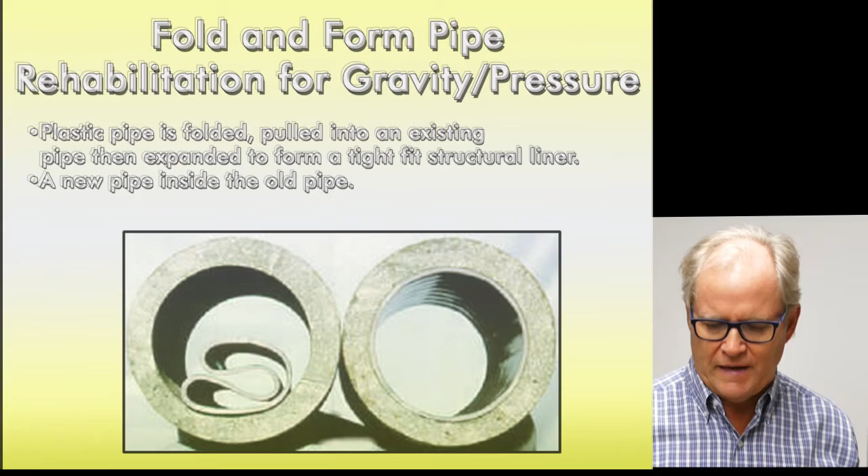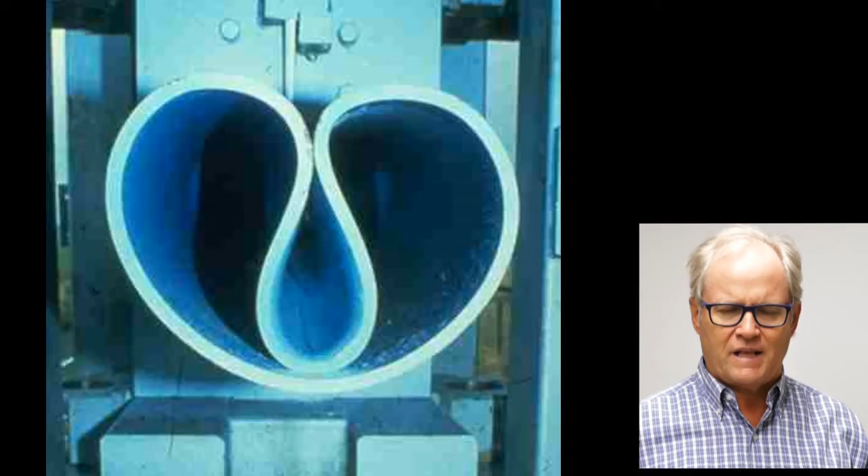Fold and form. Fold and form is another close-fit type rehabilitation of pipe. It's a PVC product that is brought from the factory in this format that you see on the left-hand side pipe, which is folded down, it's collapsed. It can either be collapsed like that into kind of a C format, or it can be collapsed down into an H format if it's a bigger roll. But it comes in a collapsed format, pulled into place into the host pipe.

Both ends are sealed. Then they inject steam and air into that to soften the pipe and then to blow it up into shape. Once it gets fully into shape, then they gradually cool it down, and then it forms a hose inside the pipe. Then they go in and cut out the laterals robotically later on.

It's not used that much. IPEX, the large pipe PVC manufacturer in Canada, has bought the franchise for it and is now starting to reintroduce it back into Canada. It was here 10-15 years ago.

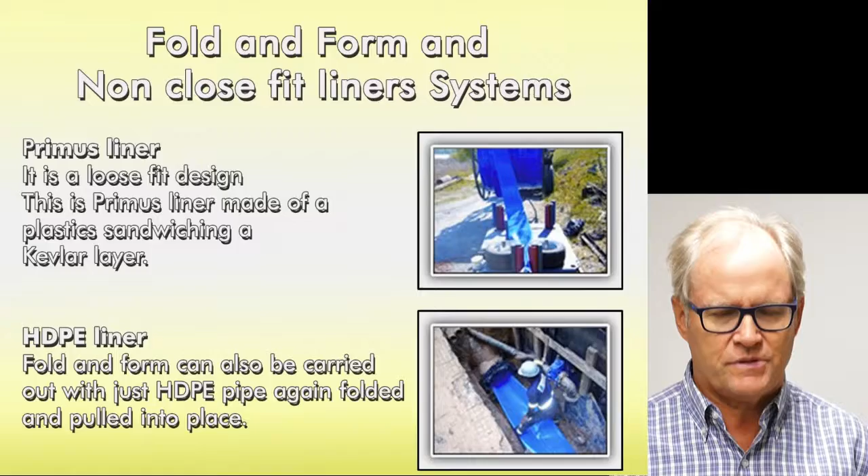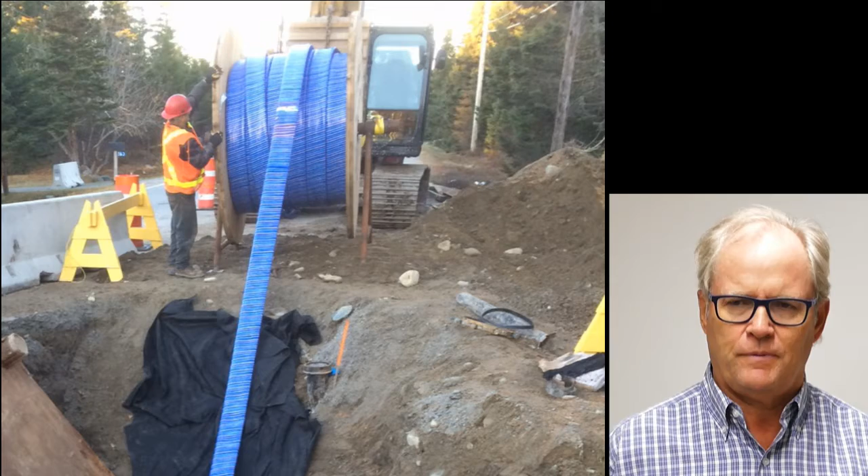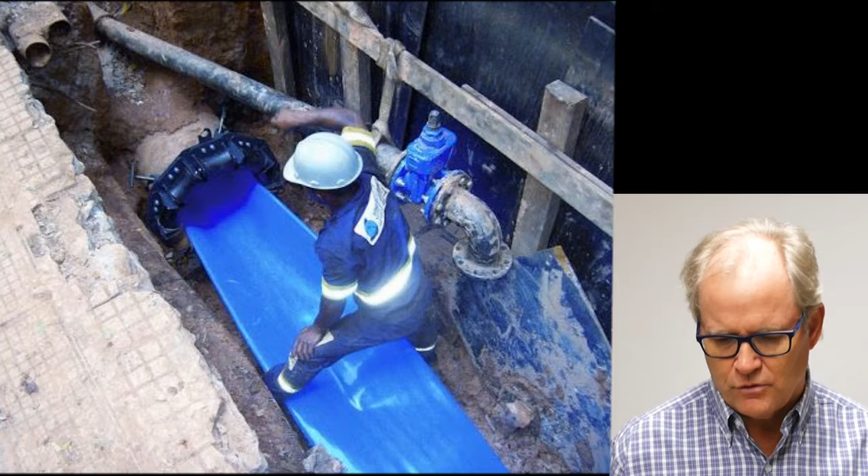Fold and form, so the fold and form, we're talking about the Primus liner. Here's the Primus liner. Some photographs of the Primus liner. It comes in a flat format from the factory. We roll it in half with some rollers and introduce it into the host pipe, and then blow it up once it's in the host pipe, and it pops back into place. It is essentially a more robust form of a lay flat hose, but as I said, very good for high pressure.

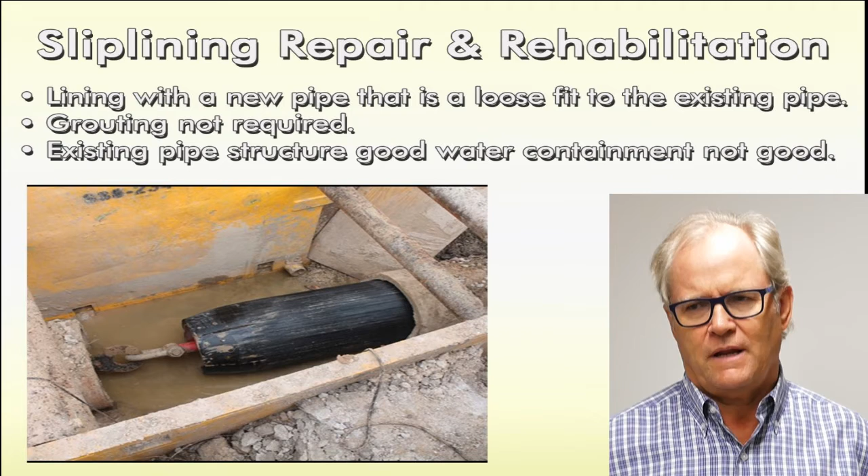The other thing we've got is high density polyethylene liner. High density polyethylene, if you go thin enough on it and you get into the DR35s, DR40s, DR50s, it more or less is a lay flat liner as well, because it's a very thin pipe. Again, you can fold that down, introduce it in, and then let it pop back up again and become a close liner. Or you can use high density polyethylene as a loose fit liner and introduce it as a rigid pipe.

Here we go with a slip liner. Here's the loose fit high density polyethylene as a slip liner into a water main project. This is a rehabilitation of a water main project in North Burnaby a year or two ago. And it's quite a large diameter. The existing pipe was a 36-inch pipe or a 900mm pipe, and we brought in a 750mm high-density polyethylene into this pipe to rehabilitate it.

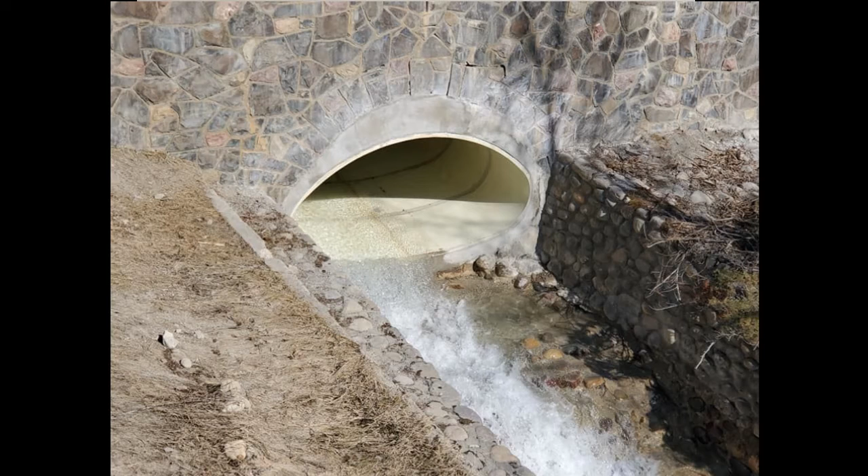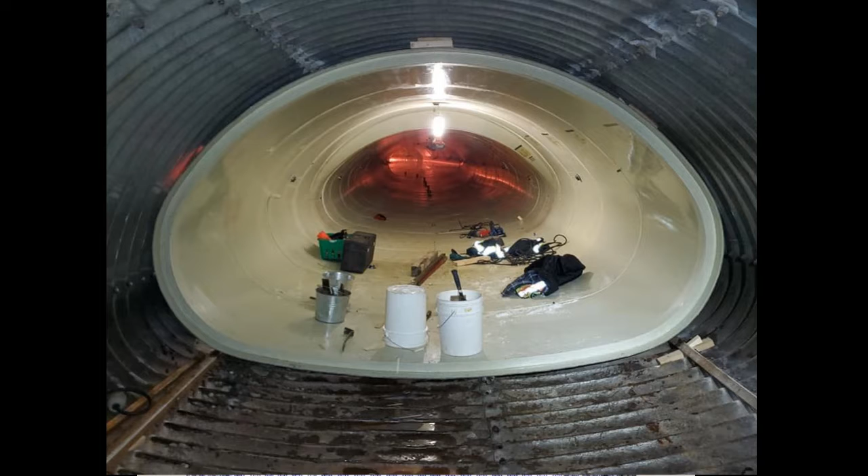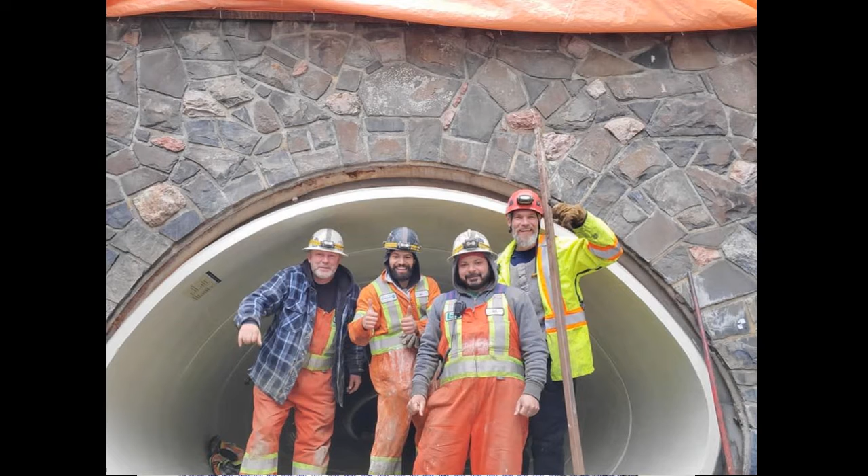This is a totally different type of slip lining. This is a slip lining with a rigid product. This is suitable for storm sewer situations and or sanitary sewer situations. This is a fiberglass pipe that is pre-made for this particular slip lining job. They're actually made in Dubai by a company called Channeline. Hobas is another manufacturer down in Texas. This pipe is shipped into the job after you've tested your existing pipe and you've proved the diameter and you're ordering the pipe to fit.

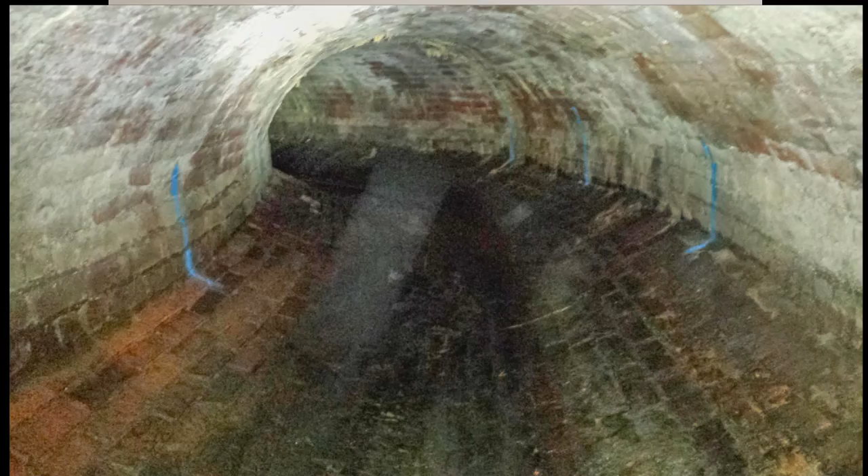Here's an example of the Channeline pipe being used in Victoria on a brick sewer line underneath the Ross Bay Cemetery. This is a very challenging job in that we only had one access point to this one. And there was a number of drops and bends on this one. But again, the Channeline pipe was able to be ordered in short enough lengths so that it would fit around the bends and fit around the vertical drops.

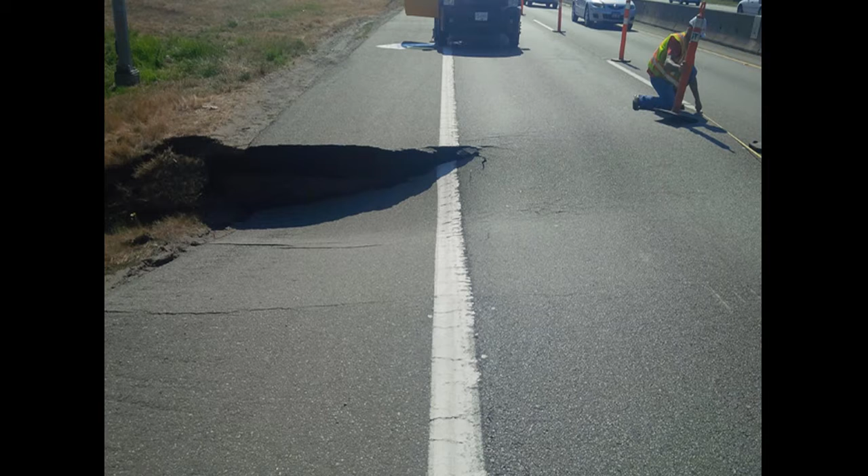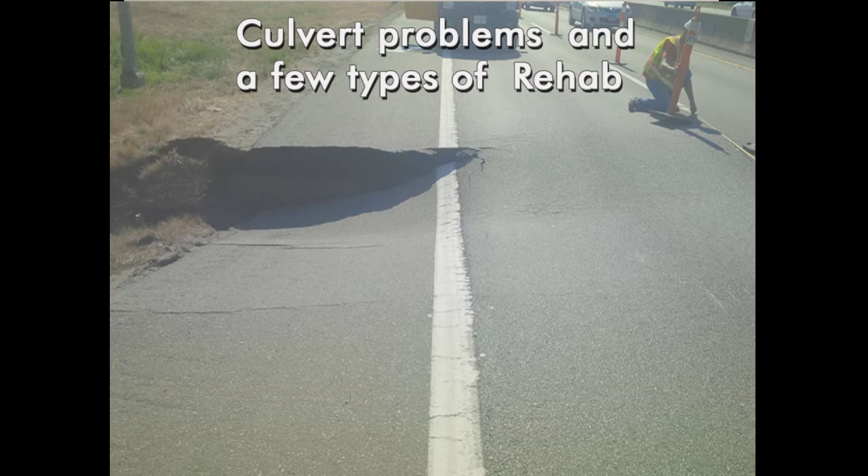Culvert rehabilitation. Culverts exist all over British Columbia and all over Canada, in fact all over North America. We have approximately 30,000 culverts in the Lower Mainland and the Greater Vancouver area alone under highways. They've probably been the poor brother of most rehabilitation processes so far. Most cities don't have a handle on their culverts right now, but as I said, they're probably the last ones to be rehabilitated.

Here's what happens though when you don't rehabilitate your culverts. Here's an example of a culvert in Richmond that collapsed about 3 years ago on Highway 99 just south of the Oak Street Bridge.

Here's the picture of that culvert on the inside. The face of the culvert we're looking at here is the north face, which is against the Oak Street Bridge. That didn't fail. But you can see right in the middle of the photograph that the corrugated steel seems to be gone. And it was, in fact. When we went through and tested that pipe after it failed, we found that there was one 2.5 meter section of pipe that I could put a hammer right through.

But the failure was very local. It was about that line that you see there, 100, 200 millimeters above that, and below that the steel was at full strength again. So it was a very local failure, but it caused a shear.

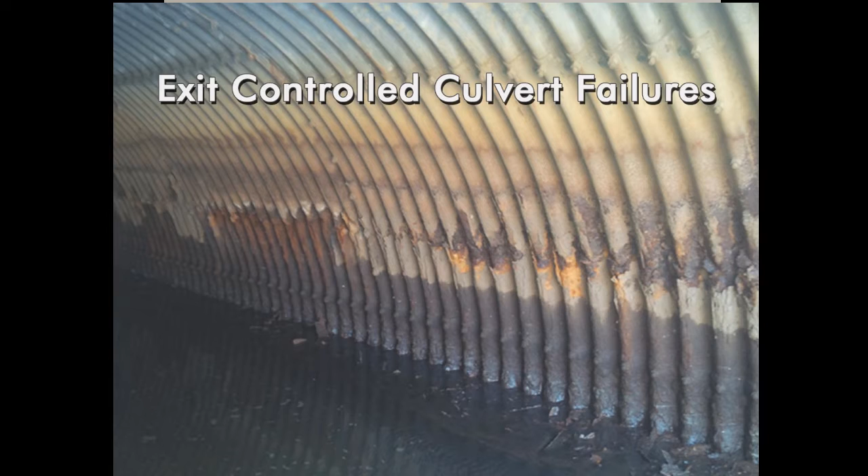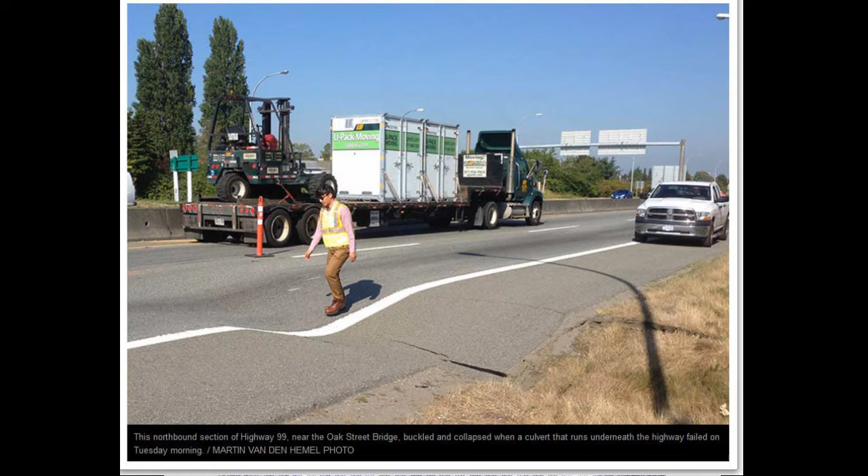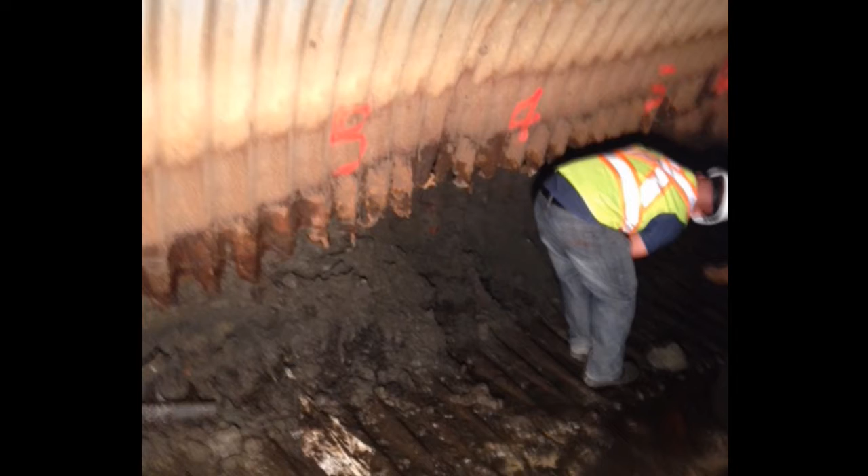That's the shear. That's the south side, which is what caused the failure, as you saw in the photograph two shots ago. So the crown sheared and fell inside the bottom section of the pipe, and that allowed the material to come in and allowed the road to collapse. The pipe wasn't going to come down completely, but it was going to come down about 400 or 500 millimeters, which of course is not any good when the road is above it.

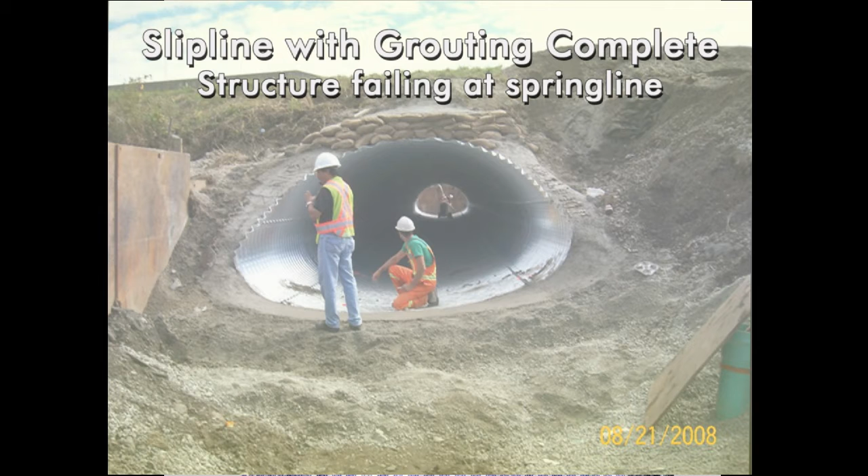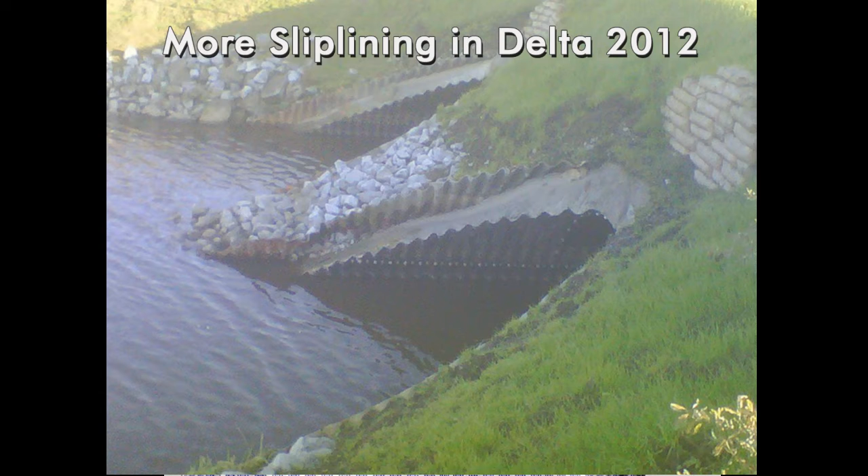Here are some culverts that we repaired or rehabilitated in Delta, where 112 crosses over Highway 99. In fact, we did Highway 99 there. We did, this is Hornby Road, and we also did BC Rail, all in this zone, which is for Central Creek going through Delta.

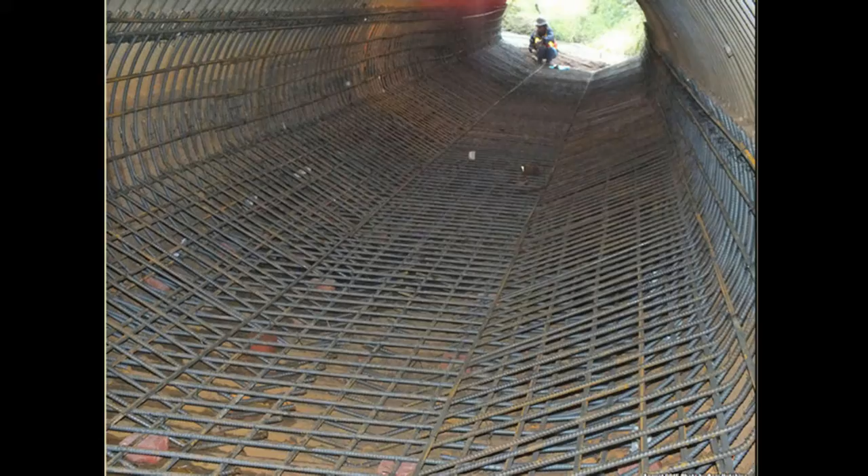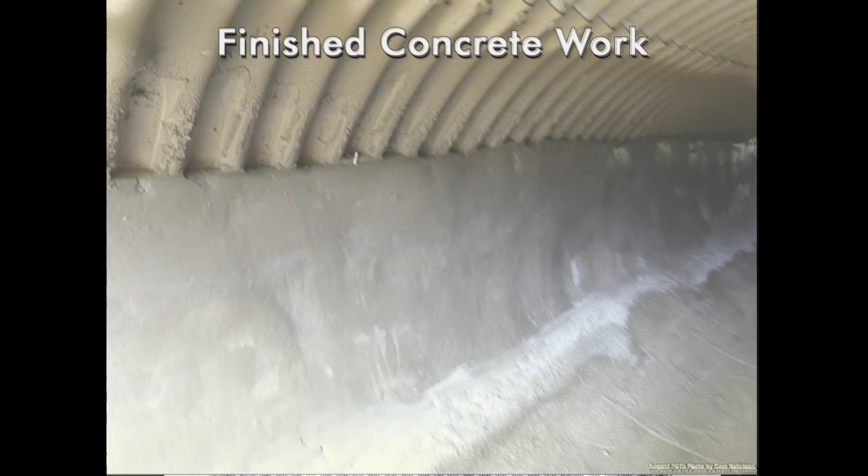Here's another culvert rehabilitation methodology that we've been using, which is to reinforce inverts to the culverts. This is very suitable if the invert is gone, if it's an entrance control culvert. So generally, let me step back one second. If it's an entrance control culvert, meaning that the entrance is what controls the flow of water going through the culvert, then what tends to go is the invert of the culvert.

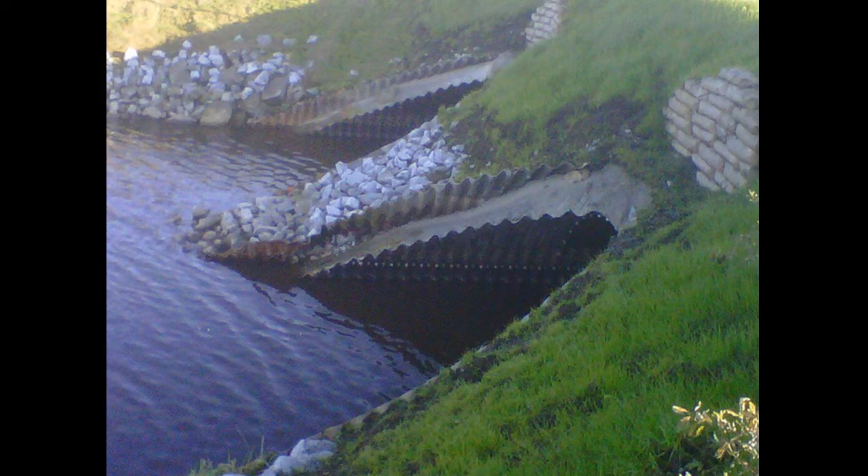If it's an exit control culvert, which is very common in Delta, Richmond, where there's standing water in the culvert most of the time, the area of corrosion tends to be about 9 o'clock and 3 o'clock, or thereabouts, 8 o'clock and 4 o'clock. And the inverts in those pipes can be in great shape. However, we have to rehabilitate.

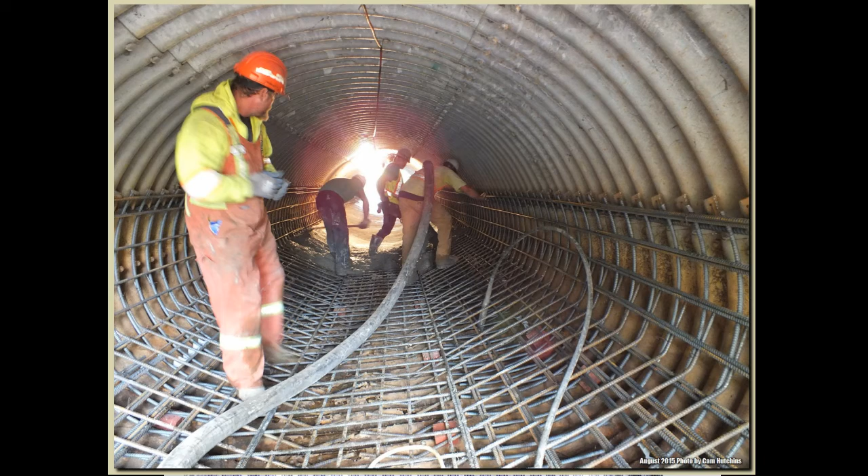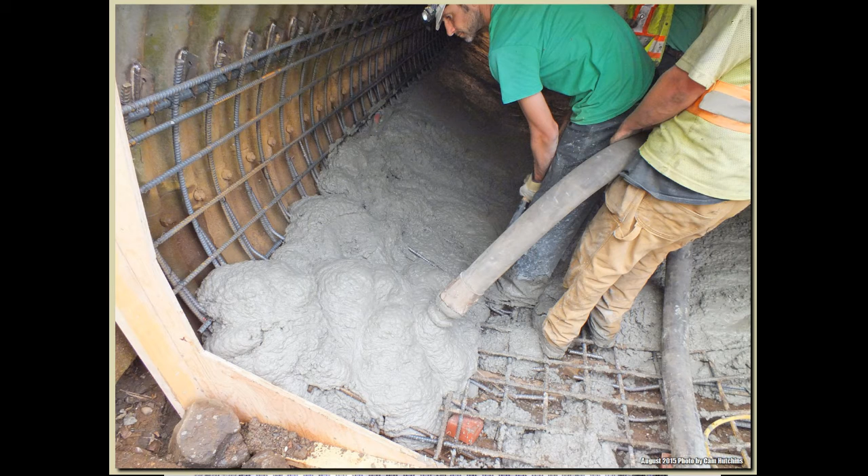And so we're back into this area again, where we said two things about this culvert here in particular: as a vessel to contain water, it doesn't function anymore because it's got holes in the sides, so the water is percolating out into the ground, number one. Number two, as a methodology to maintain a structure, it has lost that ability.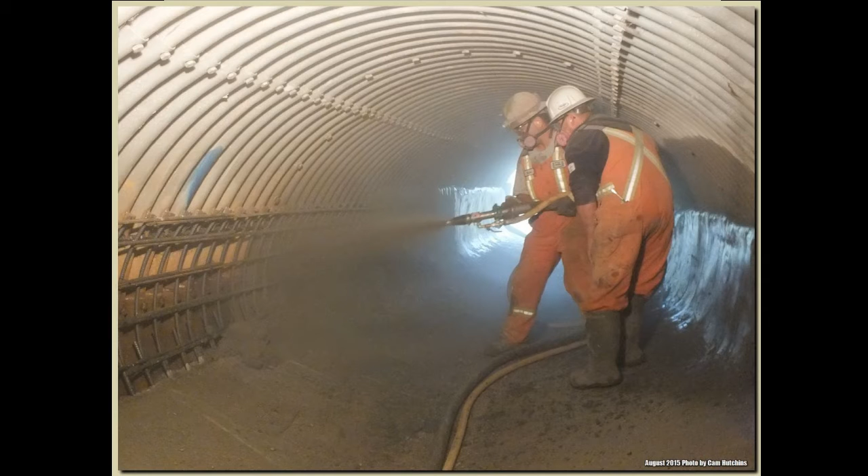And so we're rehabilitating it such that it will have a structure, it'll be able to hold the ground open, and therefore the road won't collapse above it, number one. Number two, that it will contain the water and carry the water from one side of the road to the other without allowing that water to go into the road structure. So when we do these rehabilitations of culverts, we're fixing two of the issues that we had at the very start. So here's an example of the finished product.

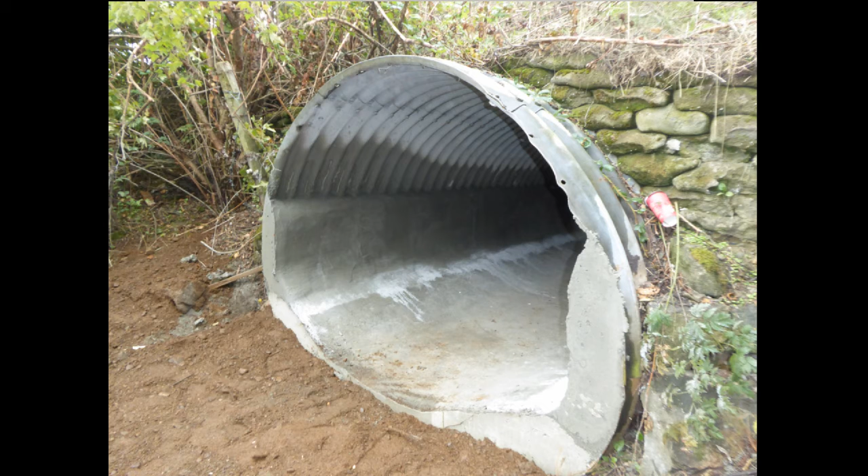You can see on the side here, the side was shotcreted on, the invert would have just regular concrete on, so you've got a cold joint where that white band in the concrete is. But that culvert right now has probably got about 70, 80 years of lifespan in it, and you're still utilizing, number one, the structure that was done initially, the tunnel that was done initially, and you're utilizing the existing corrugated steel at a much lower cost than open cutting this project, plus the inconvenience to traffic of shutting down. Most of these are highways that you're trying to shut down.

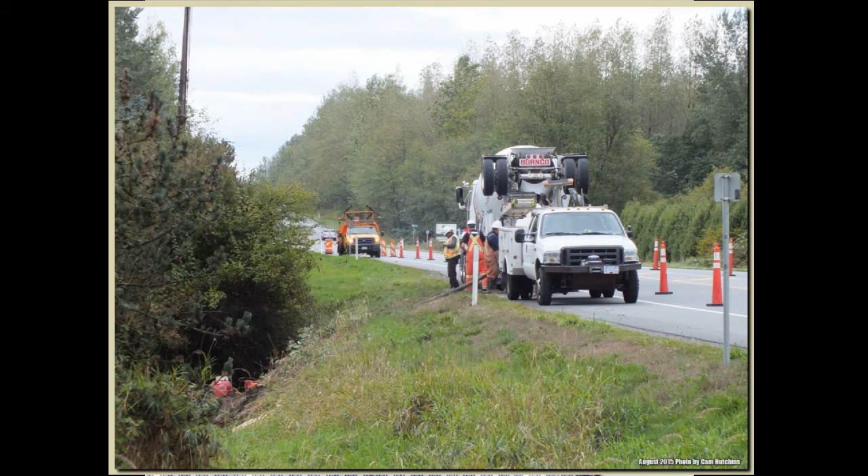Also, because you now have a smooth bottom and smooth walls, you have increased the capacity on average 20-22%, because your N factor has gone way down.